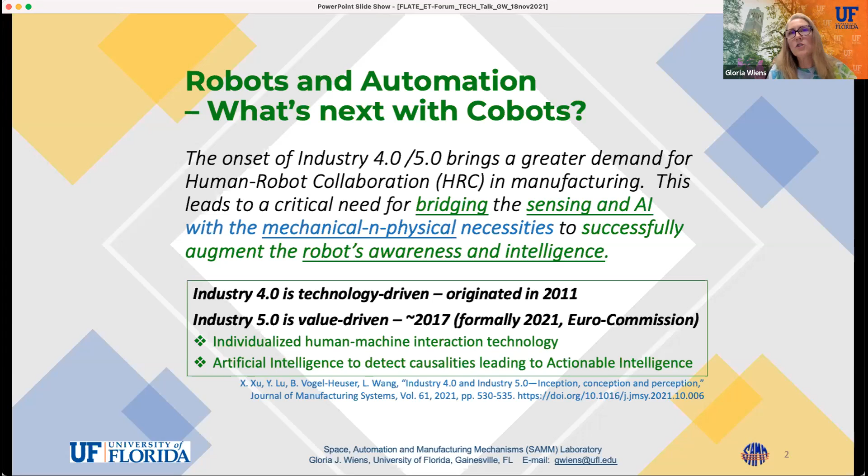In terms of Industry 5.0, there are 6 enabling technologies that they cited, and 2 of those I feel are most relevant are listed in the slide: individualized human-machine interaction technologies that interconnect and combine the strength of humans and machines, and artificial intelligence, which detects causalities in complex dynamic systems, leading to actionable intelligence.

Another way to look at Industry 4.0 and 5.0 is as a combination of robotics, Internet of Things, and smart manufacturing, where smart manufacturing is having the right data at the right time in the right form, wherever you need it throughout the enterprise. The Internet of Things provides the connectivity, basically taking traditional factory automation we've seen in the past and helping connect it, bringing it into the smart manufacturing realm.

As far as the benefits for cobots, a robot user typically chooses cobots when there's a need to prioritize safety, flexibility, low cost deployment, and fast return on investment.

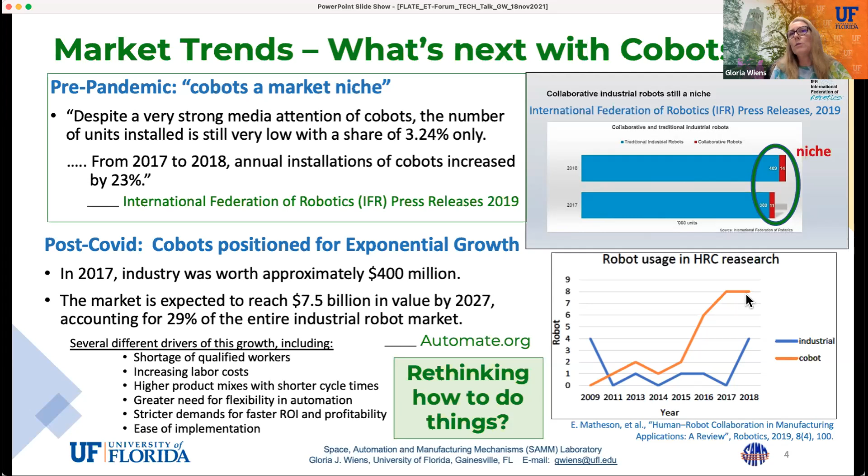In terms of research, the plot here on the right shows that human-robot collaboration, which we call HRC, is more dominant in the research realm of academia.

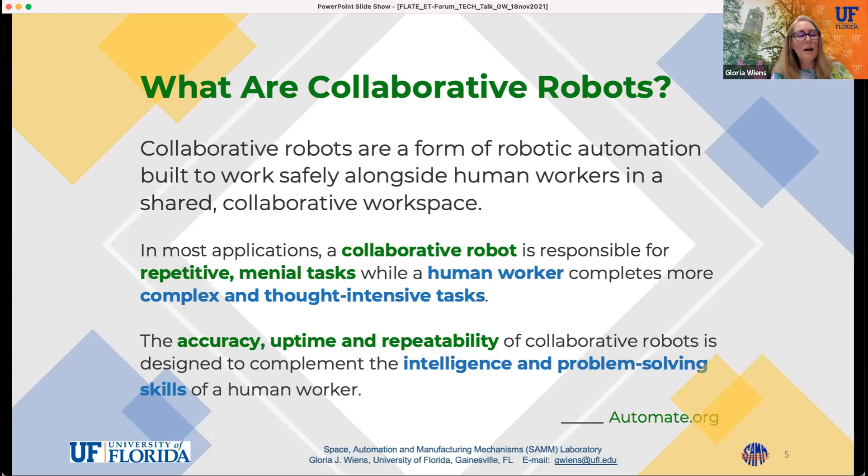I haven't really said what a collaborative robot is, which we call cobots as the short name. It's basically a robot intended to physically interact with humans in a shared workspace. It combines the strengths of humans and robots, where the cobot is typically responsible for repetitive and menial tasks, and the human worker is more responsible for complex and thought-intensive tasks, utilizing their skills for intelligence and problem solving.

SMS is basically a monitored standstill. It stops whenever the robot application detects a human entering the space, but it maintains the power on, so that once the human leaves that space, the robot's action can resume quickly.

Level 2 is the hand guidance. You'll see some in the videos the use of hand guiding, where the human basically teaches the robot by taking it through the motion you want it to do, and it records that, but also does it for a shared task.

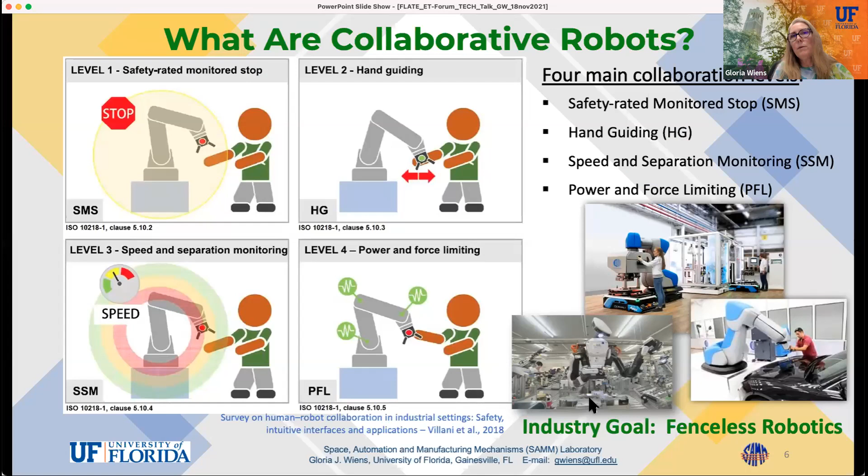Going back to this other slide, I want to point out the industry goal is to have fenceless robotics, which is why you have the cobots coming in, so you don't have all that floor space taken up building fences around everything.

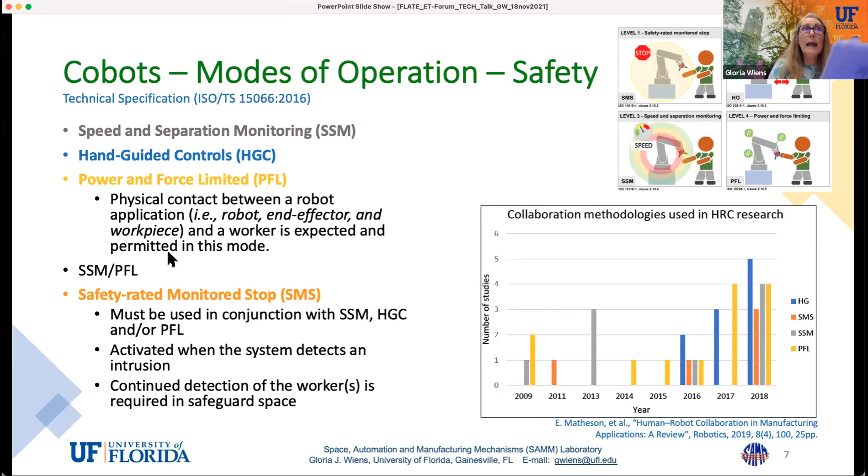In terms of research, a lot of it is going to be on speed and separation monitoring, as well as power force limited applications. Actually all 3 of these are used in research.

The synchronized type is one where the human and the robot have the same workspace, but they are accessing it at different times. With cooperation, you see them accessing the same workspace but focusing on separate tasks. So synchronized means not at the same time, but with cooperation they are exchanging back and forth.

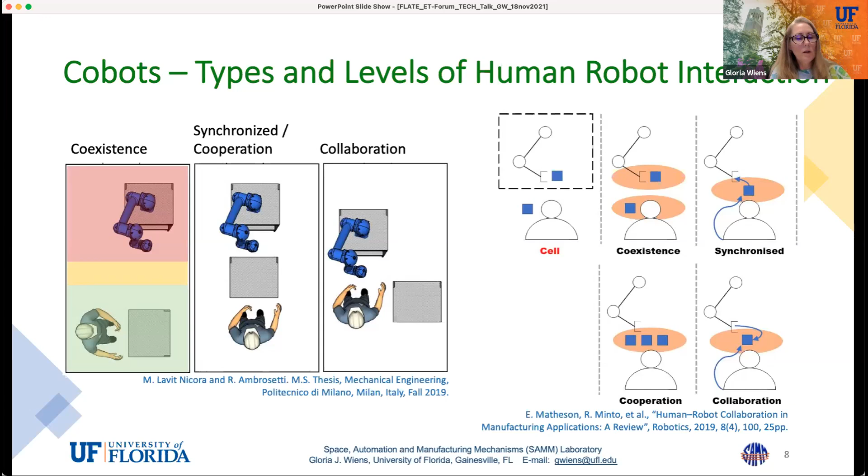For the collaborative type, the human and the robot have to work together. The task is one, executed together, so the action of one immediately has consequences on the other. Again, we have sensors and everything to help with that.

As far as the applications, it's a pretty large range. Assembly is predominantly what's being studied in university research, as well as human assist, but there are applications in many other areas out there.

One of the challenges for deployment is unraveling the work assignment: what does the human do, what does the robot do, and how do they interface? That is one of the biggest challenges there.

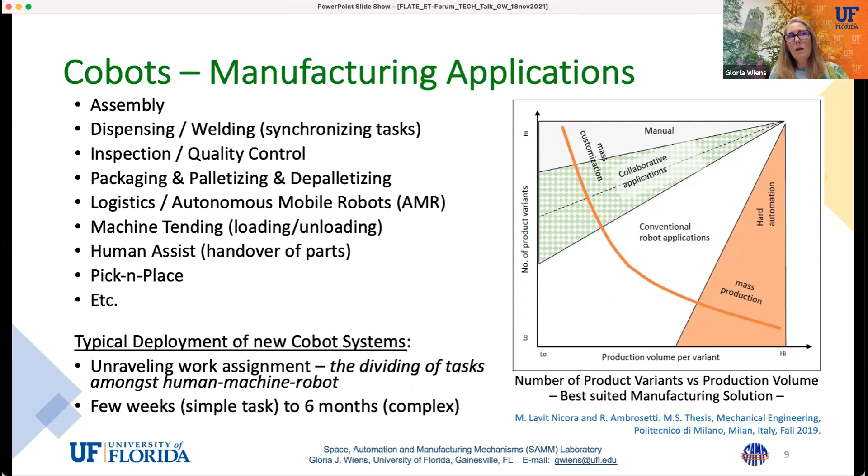As far as deployment, robot manufacturers and integrators have said that depending on how complicated the task is that you want a cobot for, it can take a few weeks or up to 6 months, but it is much shorter turnaround than the more traditional ones.

As far as sensors, the more collaborative space will use a whole combination of sensors. So it'll be a sensor suite, and again, it's application driven, based on what you need.

When you're having touch, you may have some type of haptics, tactile, or skin sensitive sensors. Sensitive skin is actually being seen now in cobots coming out, being available.

Audio, speech, and you also see in the videos later hand signals. Biosignals are starting to become of use because they're being used to predict, from your biosignals, whether you're having anxiety or fatigue, to help interface better the task and the robot.

Motion sensors are another area, and they have these smart bands, wrist and arm bands that are being worn. Of course, you also have the Google Glass type glasses.

End-of-arm tooling is another area for helping with cobots, because the end tooling could have special sensors in there to help achieve a task, for example, like metrology.

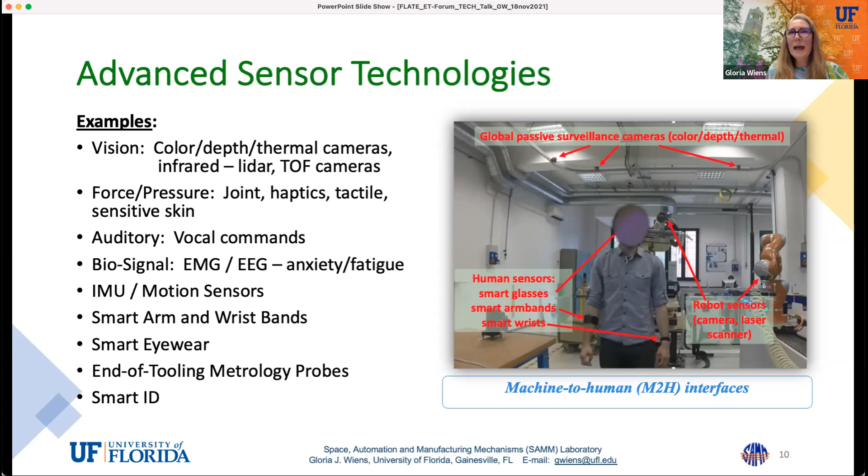Smart IDs help the robot know which human it's working with, because humans work differently. If the robot has learned that, then it can behave accordingly.

All right, so these are some applications here. I'm going to try to do this with video links behind there, but I think Marilyn or Teresa might have put those in the chat too. I don't have the chat open to see. Oops, now I think you can see that. Let me get these other different screens here.

There's Cobot Assist, which shows polishing a car hood. It's actually one of the larger cobots available in industry. You have lifting heavy, like a heavy assembly action here, whereas this is a mobile unit here. You also have palletizing, which is very popular.

I'm going to try to go to these, and this is where the challenge is going to be, because these are videos which show you all those different modes as well as real end user use. One is KUKA first, then FSK Industries using Universal Robot next, and then Esys Automation and Fanuc Robot being used in dispensing.

So let me give this a try and see what happens here. You need to let me know—I don't know if I can get... Marilyn, can you give me a thumbs up, or Teresa, can you see this or not? It's working fine, I can see and hear it.

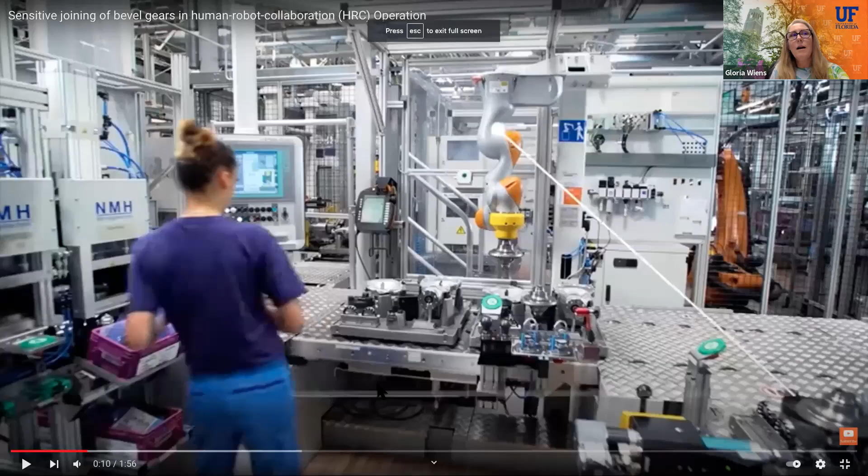All right, I'm going to try full screen so you can see it a little better. And it should be going now. This one is a really good video here.

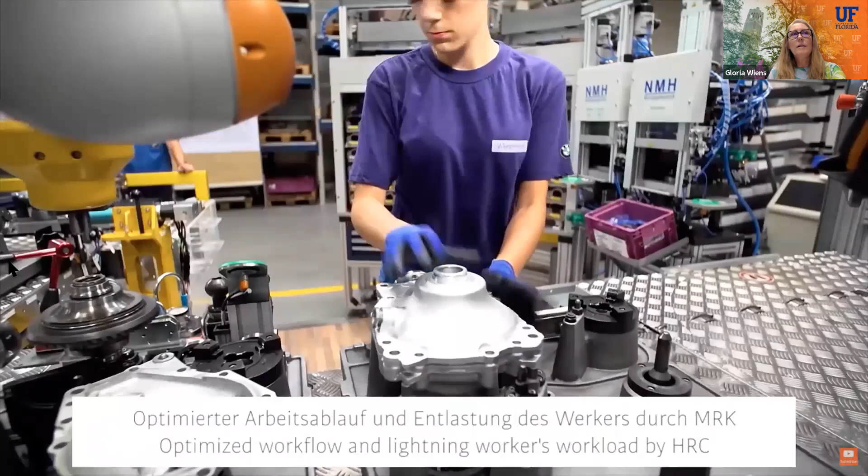All right, I think you now see my PowerPoint again. So I'm going to go to this one here.

I think I might have to close the screen. Whoops.

Okay, so I got this one here, and this is already on. So we can go dive in.

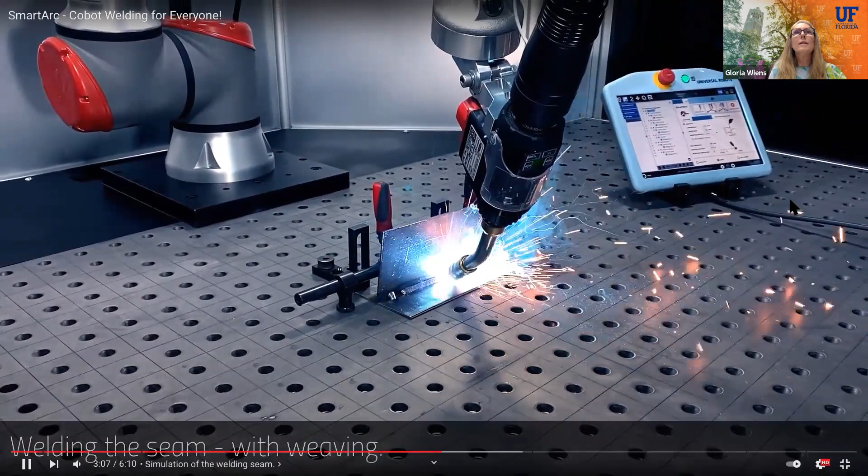Okay, and my last video is this one here.

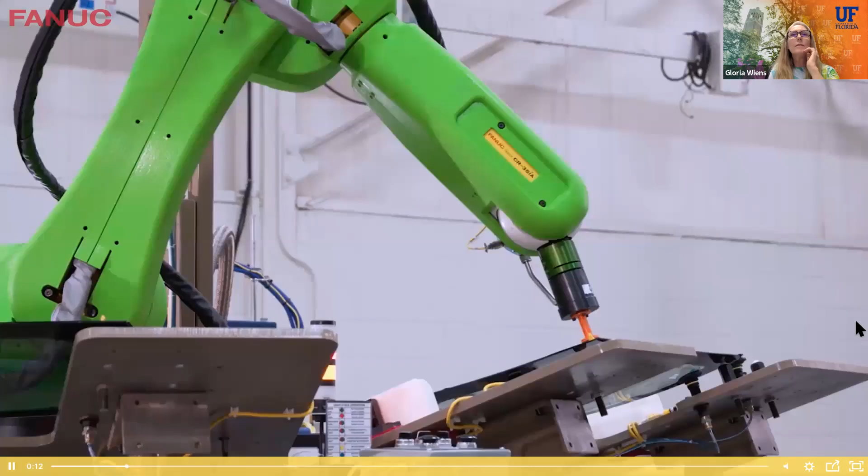I'm not sure if you can still hear me, but this one also shows how you share the workspace.

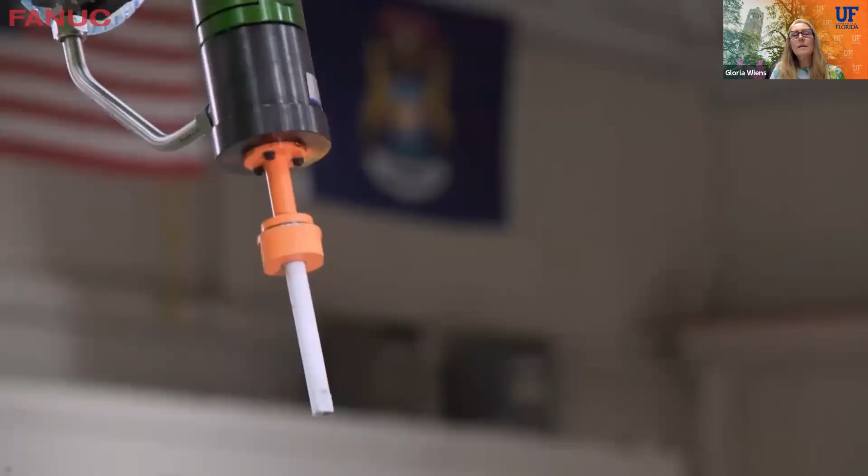Okay, so... oops, I hit the wrong thing here. There we go. All right, thank you.

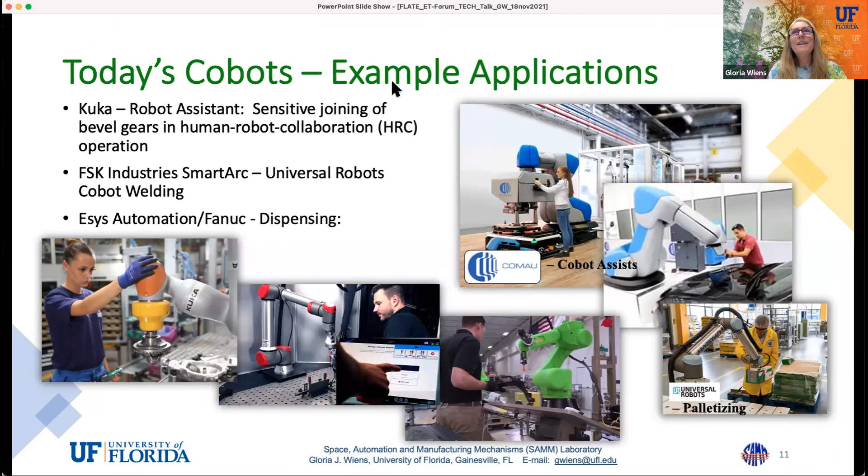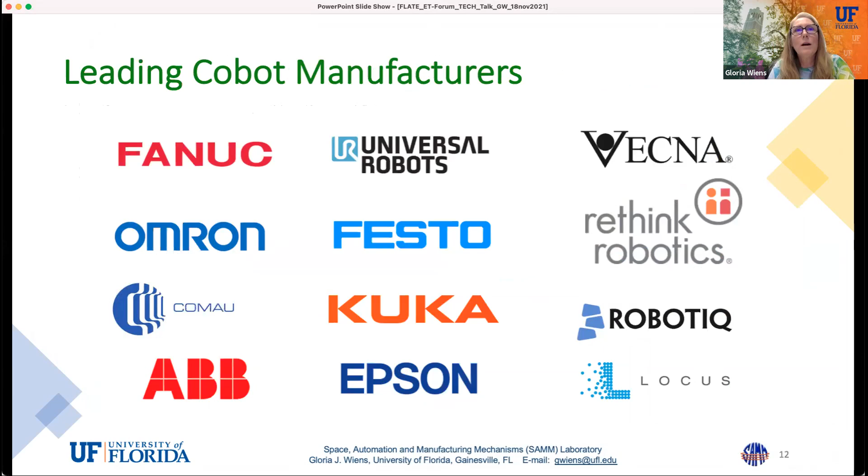Back to my slideshow now. Can you hear me? So this is just some of the leading cobot manufacturers here. You just saw videos from three different ones of their end users using their robots.

In terms of challenges, there's still a lot of challenges in cobots, but you see there's a lot of benefits too that industry is actually seeing and realizing.

Priorities in the challenges and pushing the state of the art include human safety and productivity, both of which are utmost in terms of priorities. However, they can be conflicting because for safety, sometimes you have to stop and wait, which reduces your productivity. So trying to find the right balance there helps enhance or at least respect productivity so you don't have too many delays due to human and robot interaction.

There are physics and fundamental limitations. The task complexity, as I mentioned before, is unraveling that task definition to be most effective.

And then building that trust between the robot and the human. It's not just the human building trust in what the robot's doing, but also there's an application looking at how does a robot build trust in what the human's doing so they can have better reaction or interaction between each other. So I'm looking at advancing the proactive and reactive robot responses to human motion, as well as vice versa, because I look at it as a two-way communication that's on the horizon.

So there's risk assessment, there's human and robot intent, sensory feedback is important. The more we can do that—one of the integrators from a webinar I went to mentioned that they use monitors to show the human that yes, the robot is seeing them, so that they feel confident the robot realizes they're there and build that confidence level.

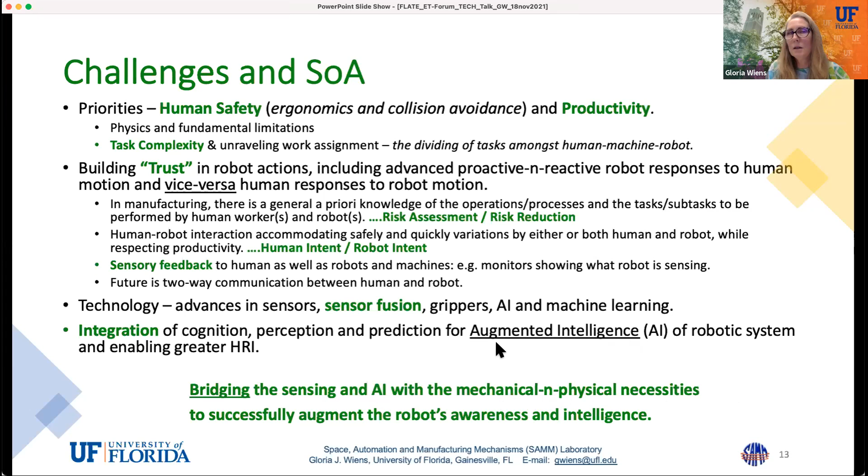Other thing is integration, and I'm changing the name of AI. I call it augmented intelligence for me, because I'm looking at the robot control end of the whole human-robot collaboration scenario. Basically we need to be bridging that sensing and AI, artificial intelligence, with mechanical and physical necessities to successfully augment the robot's awareness and intelligence, which ends up with augmented intelligence of the robotic system. Of course, we have safety, as you can expect.

There's ANSI and ISO standards that one must meet in using cobots. In addition to automation and industrial robots, there's also the underlying standards—there's also the ISO TS 15066 standard, which is specifically for cobots. This org chart on the right shows you that we have different agencies within the government working on these standards and enforcing them.

Of course, you have OSHA, which everybody is familiar with—it's also in the news these days. And then under CDC you have NIOSH, which also has been looking at, highlighting the human-robot collision limits, safe collaborative working space environments, and basically evaluating the potential benefits and risk of robots in the workplace, as well as conducting workplace interventions to prevent robot-related injuries and developing safe interactions between humans and robots.

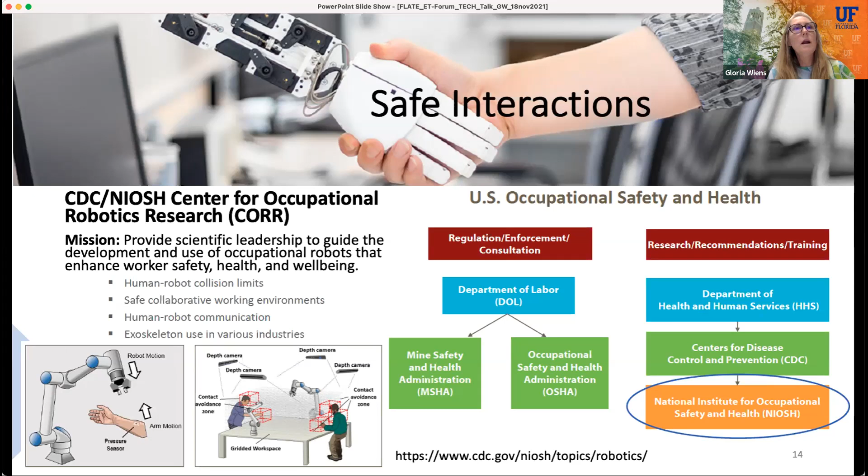And my understanding from NIOSH, when I was talking to them, they actually are in partnership with one of my colleagues here at the University of Florida that has an NSF award, and NIOSH was a part of that initiative.

In terms of research, with recent advances in sensing, computational intelligence, and big data analytics, they have rapidly been transforming and revolutionizing the manufacturing industry towards robot-rich and digitally connected factories. So collaborative robots of the future are now expected to take collaboration and productivity to entirely new levels. However, effective, efficient, and safe coordination between humans and robots on the factory floor still remains a significant challenge. Further complicating matters is that the robot is cooperating within a heterogeneous manufacturing environment that has both robots, humans, as well as equipment it has to interact with.

Collaboration, when the human worker and the cobot must execute a task together, the action of one challenges the other. So we look at one of the most useful changes that can radically change collaborative robots—that would be an increase in interactivity. And what's considered the holy grail of collaborative robots is achieving a form of true collaboration. To enable safe and effective human-robot collaboration, seamless integration of sensing, cognition, and prediction in the robot controller is critical, along with real-time awareness, response, and communication.

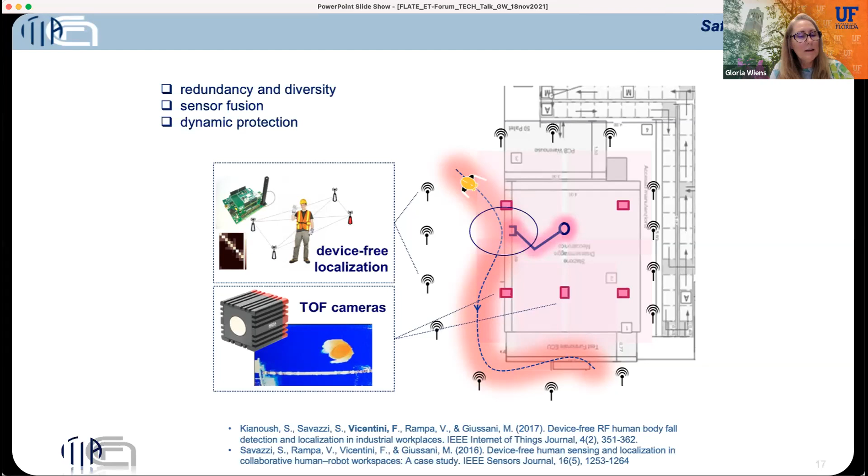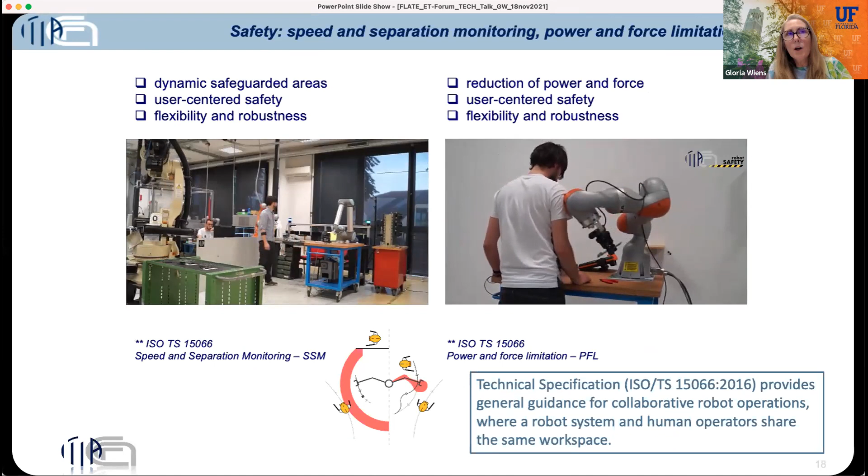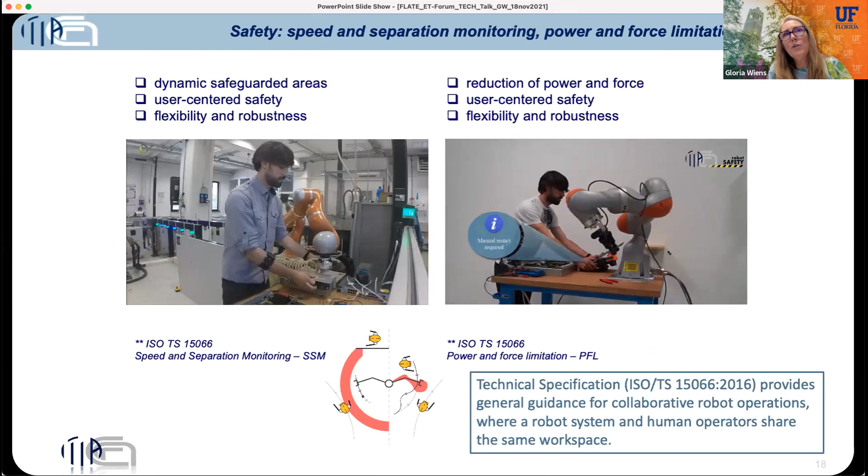This slide shows two videos demonstrating the ISO standards for cobots. The one on the left is a robotic system operating in speed, separation, and monitoring mode. You'll notice the human giving hand signals that are interpreted by the system, and the human actually pushes on the robot to activate it and get it moving to do a task. It's a very collaborative task example.

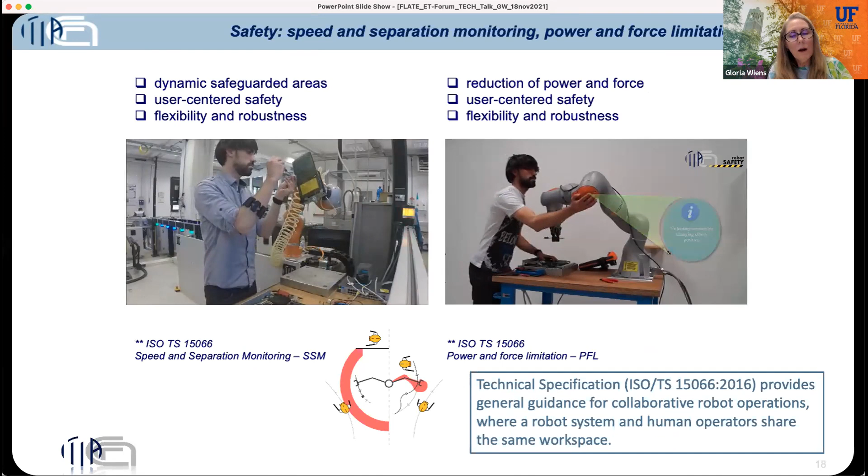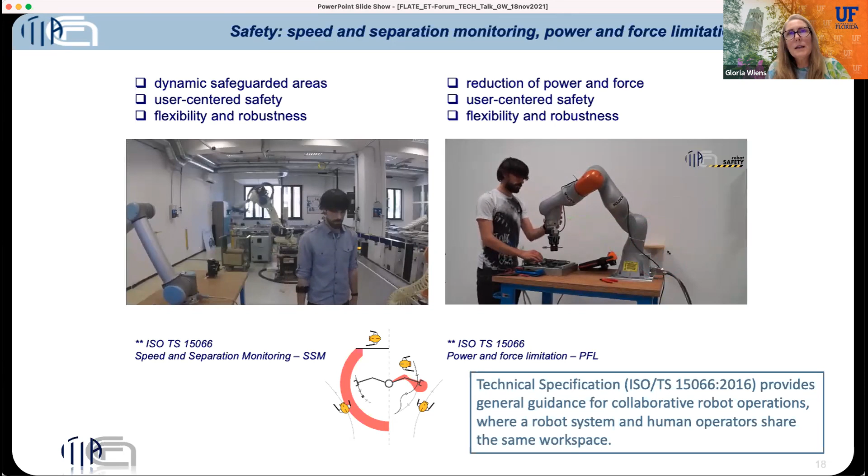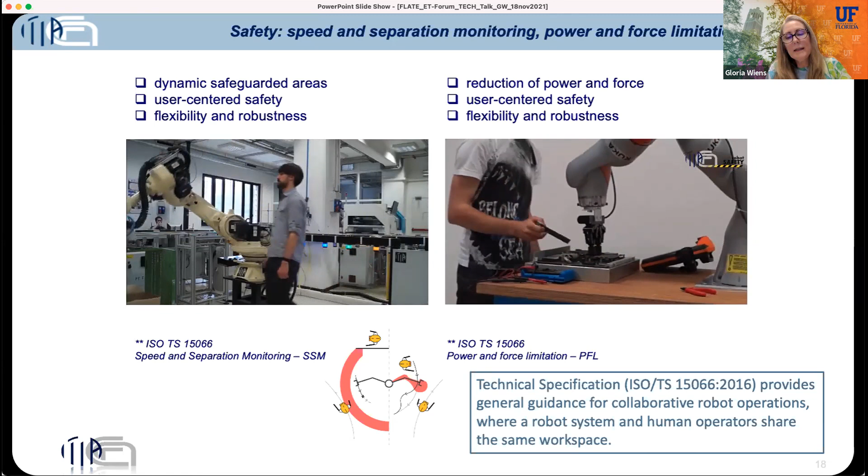The one on the right is the power and force limiting level of operation. At one point the robot bumped into his shoulder, and it sensed the bump and had a protective stop, requiring a manual reset. This is where quasi-static contact occurs with a passive gripper mechanism, triggering a protective stop. Then there's hand guiding with speed limiting, where if they move it too fast, it will stop too.

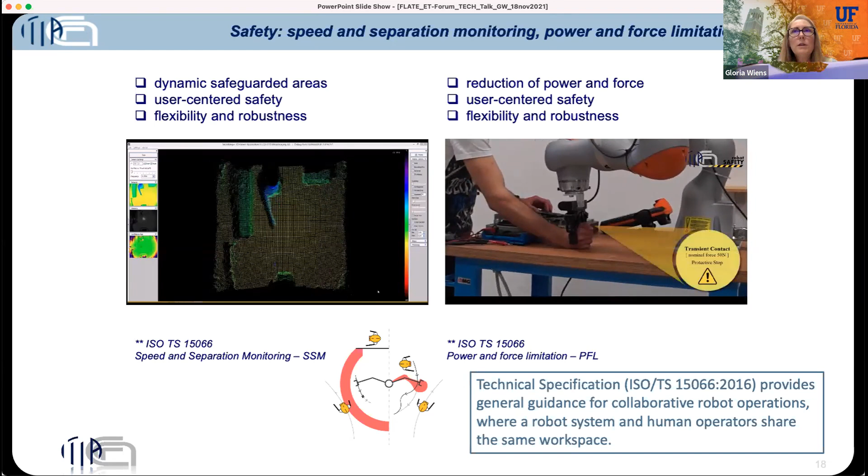This is another interaction with the gripper. On the left you also see the cameras picking up where the person is and their hand signals. So again, these are some applications of STIIMA.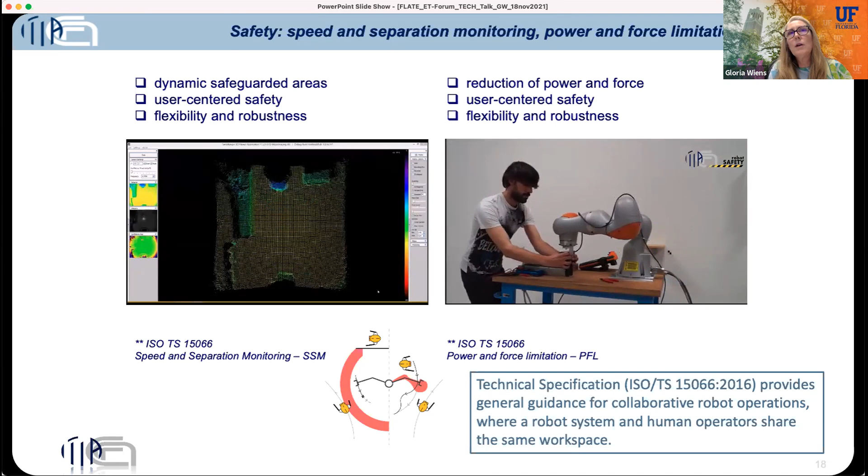We work with them - they're like NIST to us as they are to Italy on it. And they are collaborating with us on our research here.

Here is another demonstration of their work, which involves having the human go through the motion of performing the task. It's picked up through camera tracking to get that information, and then that data is fed into a path planning algorithm done offline.

What it does is determine volumes, which we call HOVs, human occupancy volumes. Each of these volumes has a different probability of the expectation that a human will be in that space at different times during that motion.

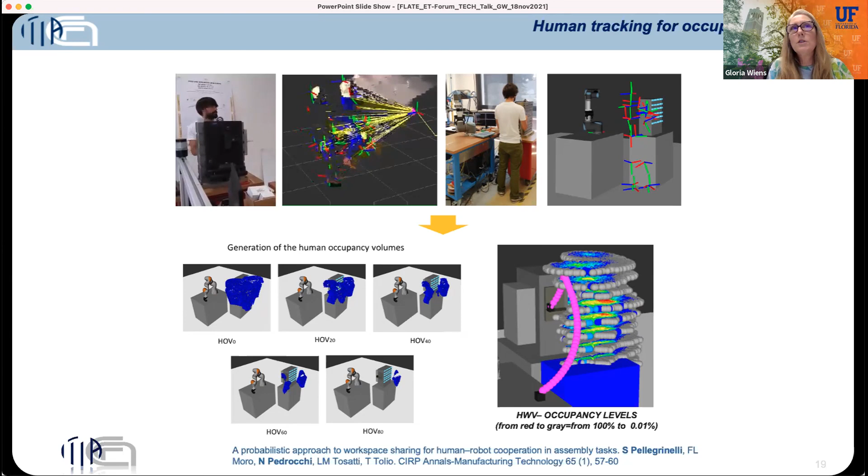They use that to help path plan, so the robot decides whether to take the risk that the probability is so low the human will be there, that it can safely move and the likelihood of a collision is small. Of course, there's always underlying protection against collisions with cobots. Anyway, that's an offline version of path planning.

So we're trying to move more toward real time and online advances in cobots. This is a project I have here at the University of Florida, funded by the National Science Foundation, National Robotics Initiative.

It involves 4 universities: University of Florida, and we're partnering with Case Western Reserve University, the Missouri University of Science and Technology, and Stony Brook University.

We partnered with Comau, and we're also looking for other industries to partner with us, because part of our project is an integration-type NSF project, meaning we need to integrate and demonstrate our research achievements in a real industrial setting.

We also have STIIMA, who have their R&D labs where we will also demonstrate in their facilities. And we're part of Manufacturing USA, the Manufacturing Innovation Institute network.

That's part of our classification, because the goal is to partner with ARM, the Advanced Robotics Manufacturing Institute, to put on workshops that bring together stakeholders in the collaborative robot space, as well as the AI space that works in collaborative robots.

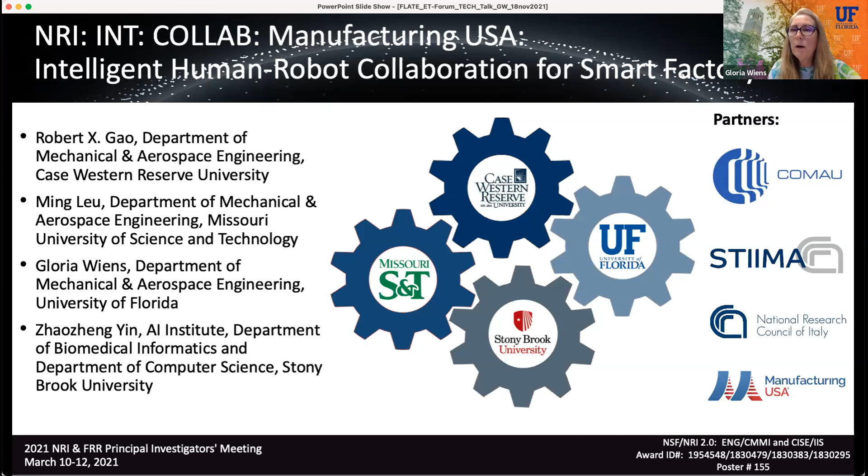We'll be having some workshops probably about a year from now. Okay, so this is our team, and here's how we're dividing up the work.

University of Florida is the action team, working at the robot control level, while our colleagues work at perception, cognition, and prediction. They're taking more of an AI approach, bringing that information and providing us the prediction of what the human is doing, so we can have a better robot action to accommodate for any deviations from an expected motion.

So we want to identify those deviations, take that data, and come up with the right reaction. If we can get it far enough in the future, we can actually do more planning ahead and prevent collisions from happening that would otherwise have occurred.

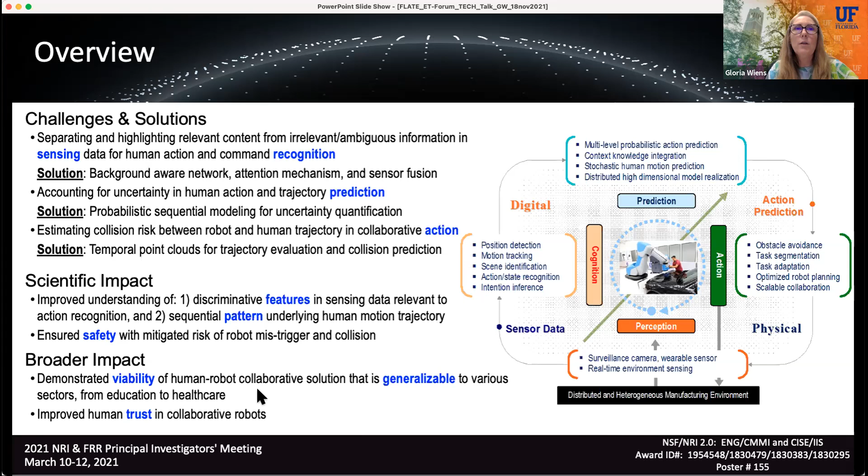And also we're building trust there.

So this is the Stony Brook group, where they're basically taking all that vision data, and through AI, finding out what's most relevant there.

And then you have the Missouri group, they are looking at hand gestures and so forth for communication, as well as doing some prediction there.

And then the Case Western group, they've done some skeleton tracking of humans, and then doing some neural nets, recurrent neural nets in this case, with probabilistic characteristics to eliminate uncertainty and minimize mistriggers.

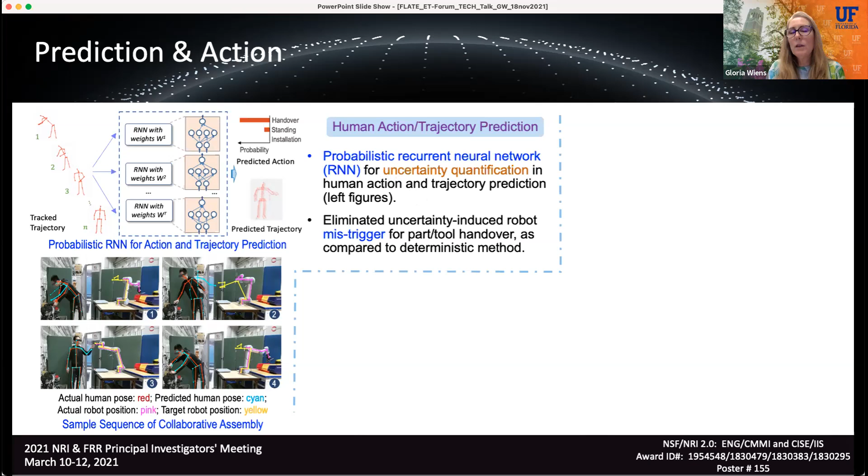And they are providing predictive information, where then we take that prediction, and depending on how far ahead we know, we might be able to, in simulation while the robot's performing, simulate whether there's going to be a collision from what's being predicted, and what the reaction should be, or whether it should be communicating with the human to have them take an alternate reaction.

That is our ultimate goal in the end, having two-way communication.

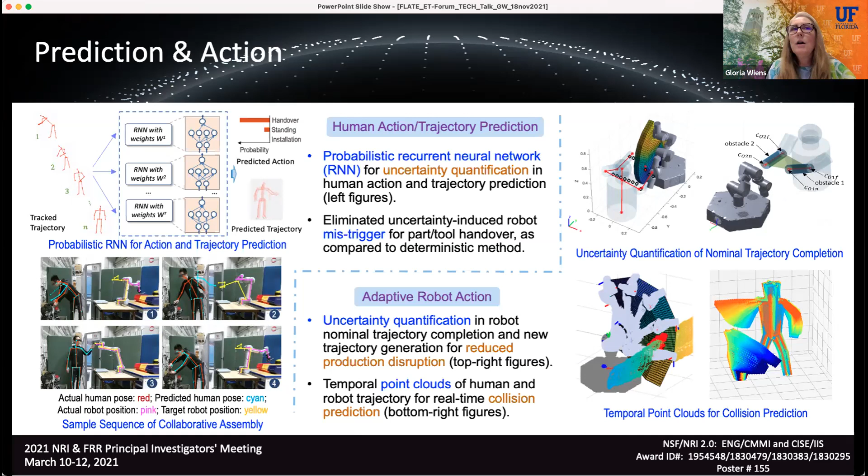We have risk of passage as well. Basically, if the robot's going to do some type of maneuver, is a human going to come together, like trying to move between the arms during some task, if they bring their arms together, will that cause a collision, or is there time to do the task? So those are the different things we're working on.

As the action team, we have our control architecture, where our framework is proactive, adaptive, collaborative intelligence, using both online planning and real-time control in different combinations. It allows intelligent switching between control types depending on the task occurring and the prediction coming in from the human motion, either perceived or predicted.

And from that we have safe robot-human interaction. We're segmenting the task into subtasks, so that certain tasks a robot should not stop in the middle of. For example, I always tell my students, if the robot's pouring molten aluminum into a mold, you don't want to stop in the middle of a pour.

Because it will keep flowing and cause a greater catastrophe than if you communicate with the human that we need a pause, because this has to complete. So basically we're evaluating the behaviors and type of task to determine how the robot will react to that interaction with the human on both sides.

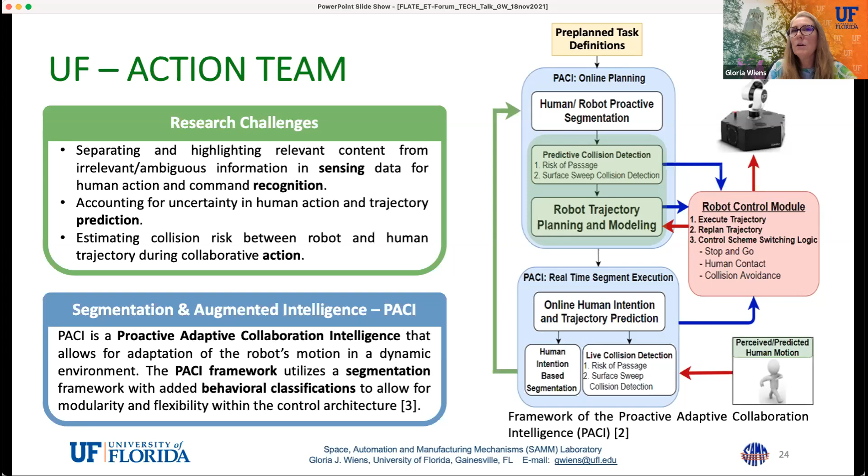In an earlier study we also looked at how far in advance you'd like to know if a collision is going to potentially happen, so you can plan and have smoother motion. We found that if you waited too late, the joint constraints caused rougher motion and you actually lost productivity. So it's not a linear relationship.

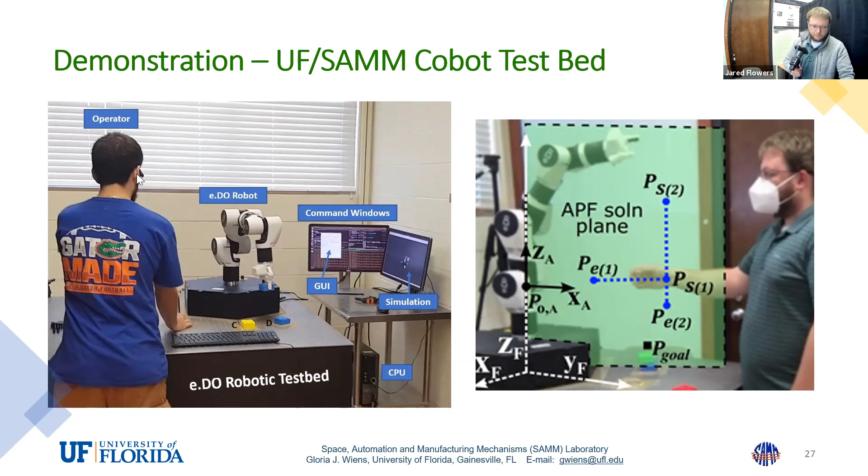The demonstration I'm going to show today is representative of a human-robot collaboration in a manufacturing setting. In a manufacturing setting, human motion could frequently deviate from nominal motions. So in the demonstration today, I will randomly put my arm in the path of the robot to demonstrate some of these unplanned human motions.

When this occurs, robots can respond proactively to avoid production delays. In the more recent publication I mentioned, we addressed the problem that trajectory planners couldn't generate a new robot trajectory when the goal pose was blocked by an obstacle. So in the method we proposed, the next best robot pose is generated, which is a pose where the robot can go to wait while avoiding collision, but still being as close to the goal as possible. And the goal was to reduce the

increase in production time due to this obstruction. So the image on the slide actually shows that my arm is blocking that goal, and the robot went to the pose you see there to wait until I'm out of the way. And so now I will share the screen for the live demonstration.

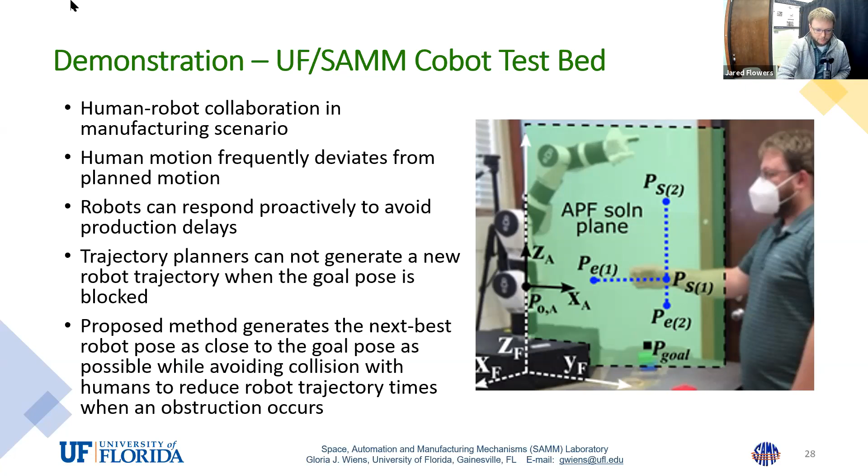Before I start the demonstration, I will show some of the user interface that we use in our lab. We've developed this web-based user interface. I'm currently on the operation tab, which has a start cycle button to tell the robot to start the task. It has a continue button because at various points in the demonstration task, the robot has to stop and wait for the user to say it's okay to proceed. There's also a repeat cycle button to make the robot do the same task that it just did.

There's also a cameras tab, and in our lab we have a depth camera just to the left and to the right of the robot, and we're using those to sense the human location in the work cell. So the two video feeds at the top of the screen come from the left and right cameras respectively.

We're also using skeleton tracking software called OpenPose, which is taking the video feeds and has neural networks inside of it that are estimating where my joints are located. The tracking software is also overlaying the colorful line segments to represent my skeleton. So in the video feeds, you see those colorful line segments kind of following me as I move. And this allows us to have an estimate of the 3D location of all of my joints.

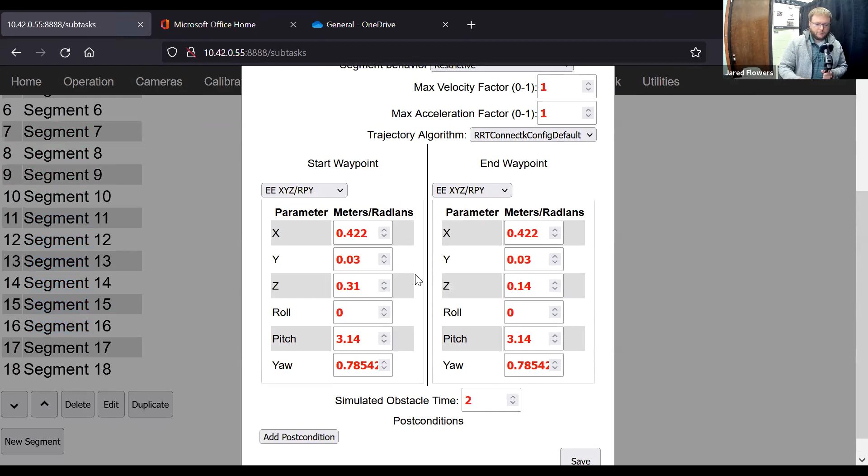The segments have start and end waypoints that the user could put in as joint angles or desired XYZ, roll, pitch, yaw. And as Dr. Wiens said, the motion segments also have a behavior for the robot associated with them.

So when the robot had picked up the green block and was moving to put it on the blue block, that was a non-restrictive type of segment, where when I put my arm in the way, the robot is allowed to plan a new trajectory that goes up and over my arm.

However, there's also restrictive segments, such as when the robot had picked up the block assembly and was moving to the inspection point. During that segment, if an obstruction occurs, the robot just has to stop and wait. It's not allowed to deviate from its nominal plan.

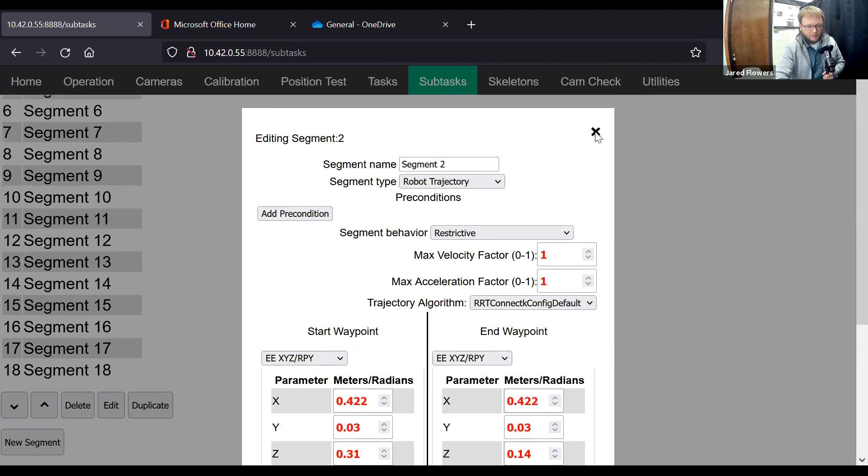There's also some diagnostics in this user interface. Like the skeletons tab shows me the skeleton generated from the left and right cameras, as well as a skeleton that's a fusion of the best data from each camera. So right now the blue skeleton looks messed up because my left arm is behind the robot in that skeleton's view.

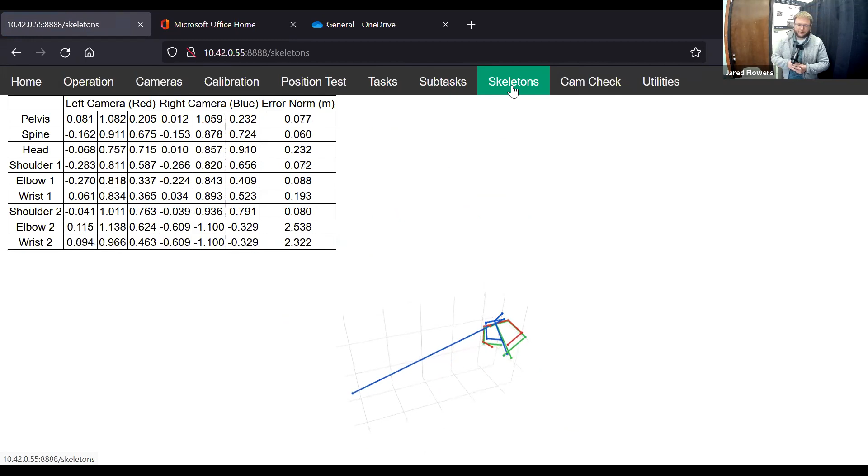There's also utilities to stop and start various parts of the system, and also recording data for research and downloading the data files. At this point, I'll show a video from one of our more recent publications.

Jared, I'm not sure if we might be running low on time. Is that a real short video?

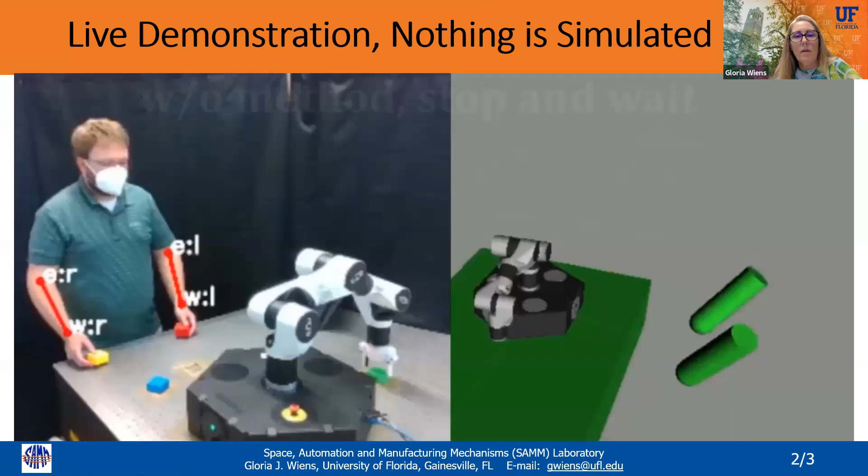Well, I'll just show part of the video. So this is the robot going to the next best pose, which we mentioned.

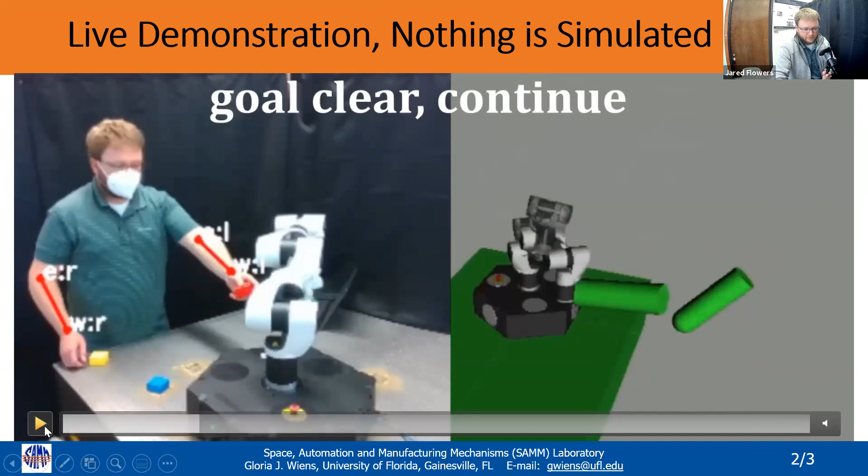However, with our approach, the robot moved to its next best pose, which is here. And then when I get out of the way, it goes and stacks the blocks. It's important to note the next best pose is closest to the goal in terms of angles, not actually visible distance.

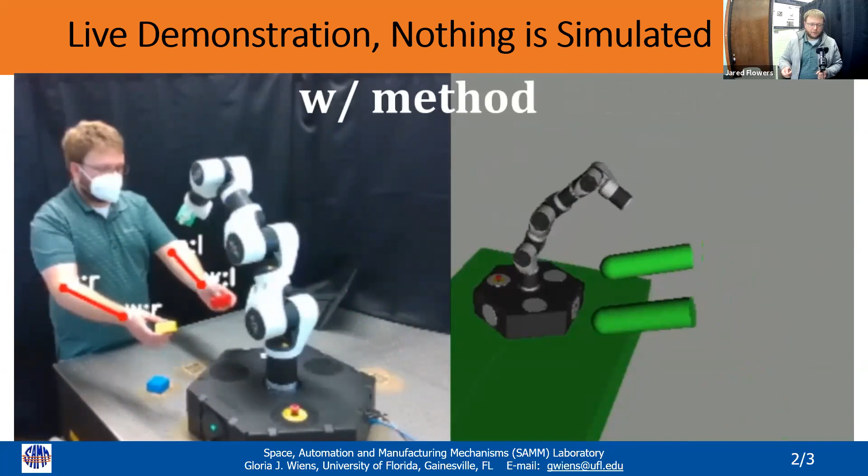So the live demonstration and the video that I showed here show just part of HRC. HRC goes well beyond just avoiding collisions. In the future, we will work on incorporating AI and other algorithms into our system.

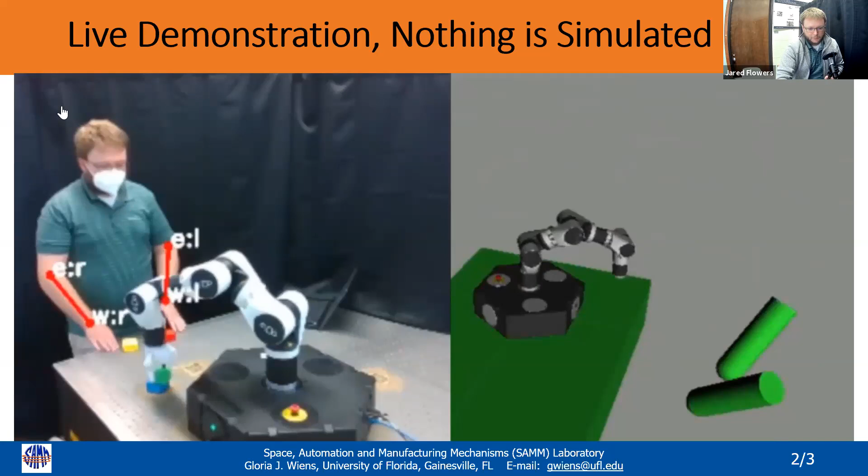So kind of closing things out, some takeaways you should see with this presentation, hopefully today, is again, there is benefits in having cobots from safety, space saving, flexibility, ease, and low cost deployment, as well as fast ROI.

Other takeaways I want to add is that keep an open and innovative mindset, because technology keeps advancing, and with new sensors and new devices and stuff, it actually enables you to maybe do something that you couldn't do yesterday, but now you can do today.

So always keep an open mind there, because you can end up with greater and improved environments.

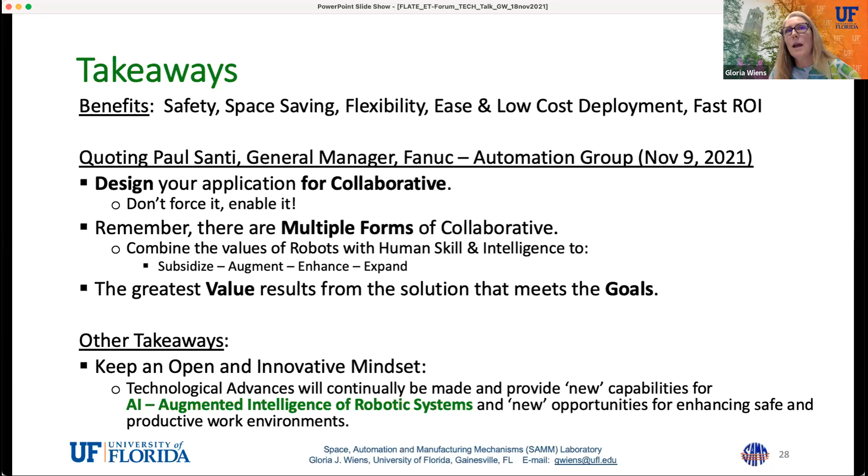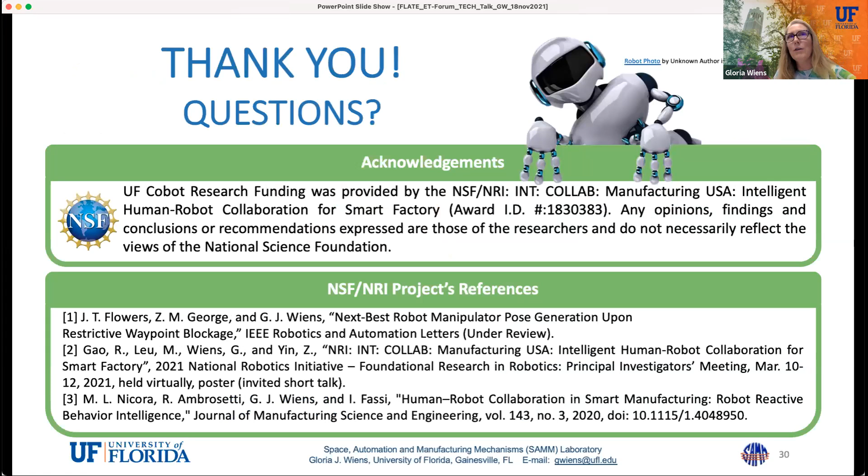So anyway, that's my pitch. With that, are there any questions?